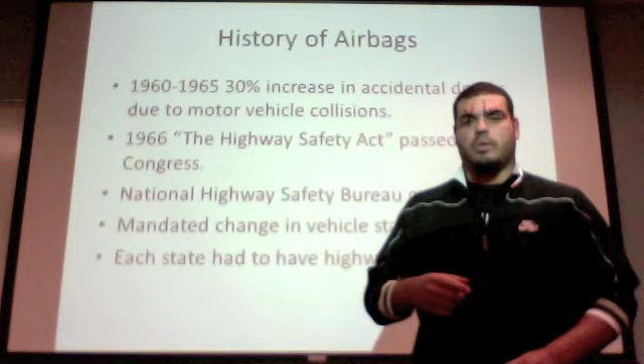We're going to start off with the history with Juan Carlos Herrera. All right. Between 1960 and 1965, there was a 30% increase in accidental deaths due to motor vehicle collisions. In 1966, the Highway Safety Act was passed by Congress, and also the National Highway Safety Bureau was created, which mandated change in vehicle standards, which also made each state have their own highway safety laws.

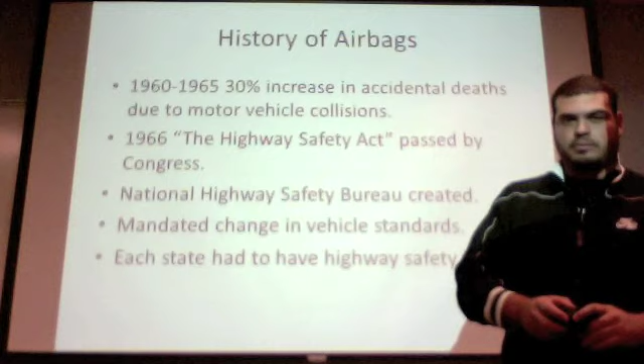All this was needed because as more cars were coming onto the roads, there were going to be more and more accidents. President Lyndon B. Johnson had this quote, "We can no longer tolerate unsafe automobiles." And airbags became mandatory by January 1st, 1973. But these deadlines were pushed back until 1976, and eventually kept on being pushed back because of the safety risks that were continuing to happen with the airbags. But the seed was planted for the need for airbags.

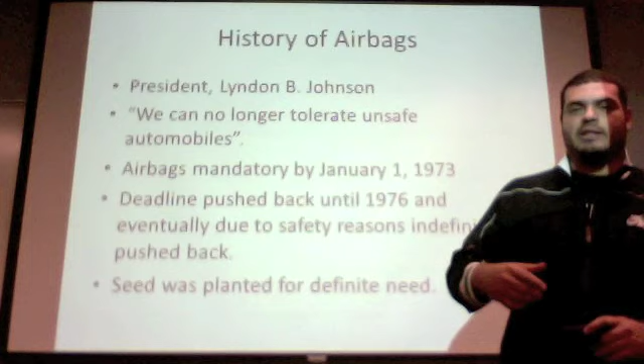And John W. Hetrick was the first person to come up with a patent for the airbag. He was a retired industrial engineer. He came up with the idea, and he called it the safety cushion assembly for automobile vehicles. He was awarded the patent in 1953. This is the patent number, and this is a schematic of the patent that he created.

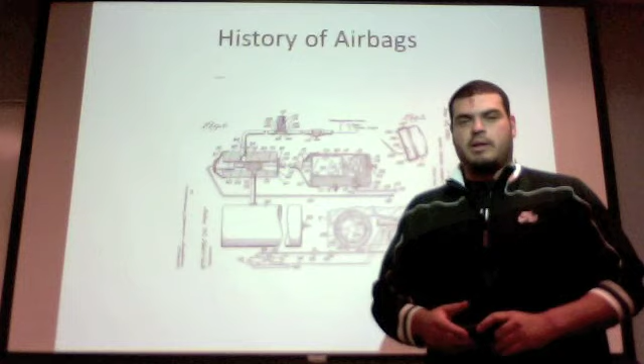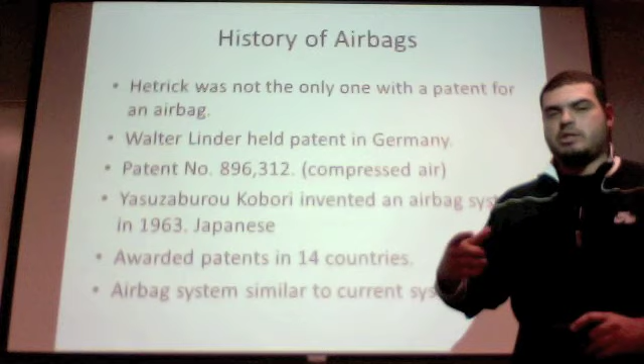He was not the only one to have a patent. Walter Linder also held a patent in Germany. This is the patent number he had, and it used compressed air. Also, we had a Japanese inventor. He also created an airbag system, and it was awarded patents in 14 countries. And this one is the one closest to the models that we're using today.

Allen K. Breed also had a patent for the airbag. He was the first to create an electromechanical automotive airbag system. He was the first to use sensors to detect the collisions in order to deploy the airbag.

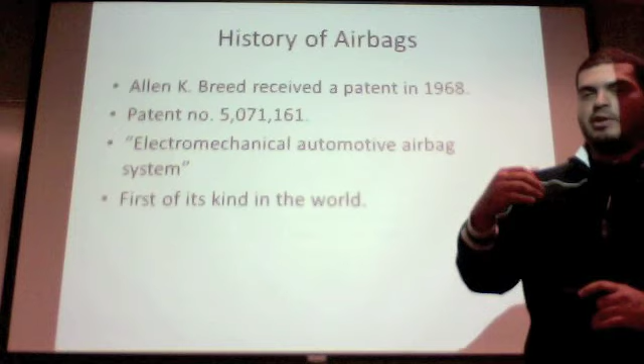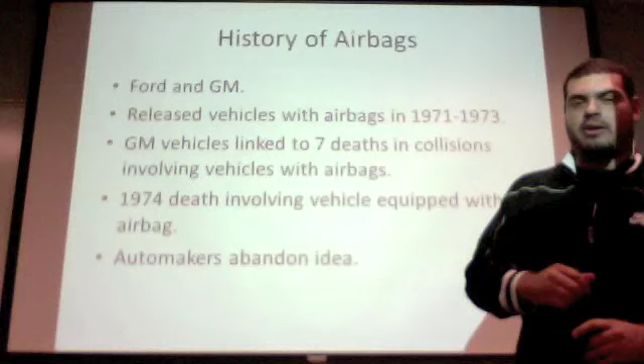Ford and GM were some of the first to go into the airbag business. GM vehicles were linked to 7 deaths in collisions involving vehicles with airbags. And in 1974, there was one direct incident where an airbag was the cause of the death, so a lot of automakers tended to abandon the idea of airbags because of these safety issues.

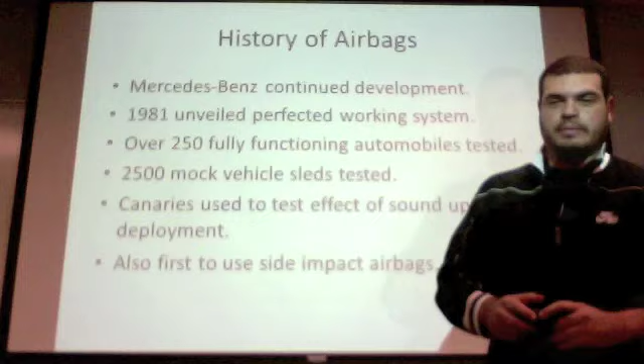Mercedes-Benz, though, continued on the development of their airbag, and in 1981 unveiled a perfected working system. They used over 250 fully functional automobiles and tested them, 2,500 mock sleds that crashed to see how the airbag would work, and they also used canaries to test the sound which would be let off at deployment. They also were the first to have side impact airbags in 1995. Now Chris is going to talk to you guys about current airbag designs.

The current design of airbags can be broken down into 2 parts: the airbag control unit and the inflator unit. The airbag control unit is pretty much the trigger, if you will. It's a microelectromechanical system that monitors a whole bunch of sensors. It also has some sensors built in, accelerometers, gyros, speed sensors, and on top of those, which are included in the module, it also monitors speed sensors, brake sensors, pressure sensors in the doors, all along the vehicle.

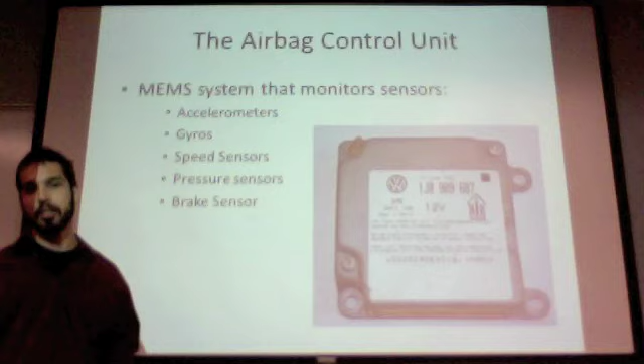It basically takes all the information gathered from these different sensors, and using an algorithm, it determines the angle of impact and the force of impact. It then uses that information to deploy the airbags accordingly. That whole process takes 15 to 30 milliseconds to complete. Once it makes that decision, it sends the signal out to the inflator unit, and on some vehicles that are equipped with slack removal devices for the seatbelts, it does that as well.

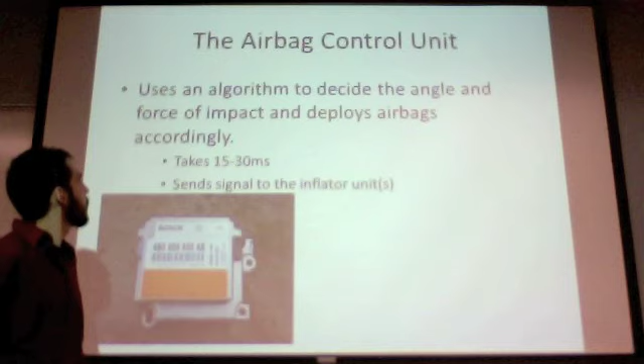The inflator unit contains the propellant, the bag, and the igniter. Once it gets the signal from the airbag control unit, also known as the ACU, the pyrotechnic reaction begins. The initiator, which is basically a conductor wrapped in a combustible material, has electricity pass through it, it gets hot, and the combustible material around it combusts. This ignites the propellant.

Now this causes a chemical reaction which very rapidly produces a gas, mostly nitrogen, and that's what inflates the bag. That whole process of inflation occurs within 15 to 30 milliseconds. All in all, everything happens in about 0.04 seconds.

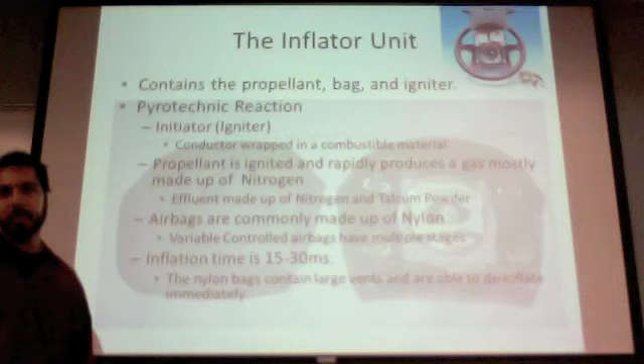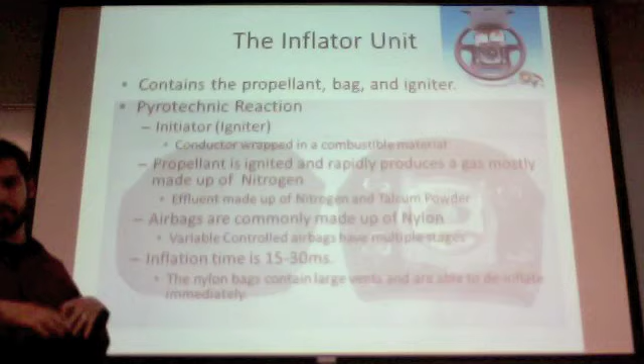Besides the nitrogen, there's also talcum powder in the bag for lubrication, and the bags are commonly made of nylon. They have large vents, so as soon as they inflate, they're able to deflate, and the only thing that comes out is basically the nitrogen and the talcum powder.

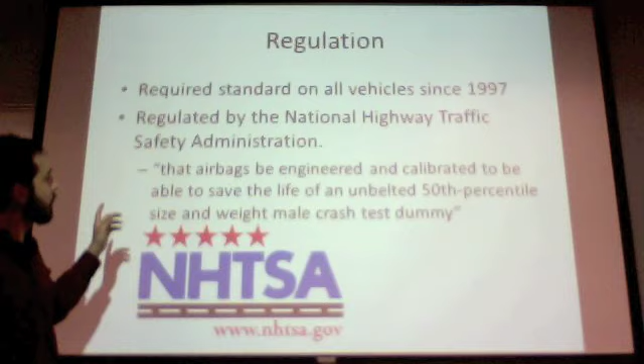As far as regulation, airbags are required standard on all vehicles since 1997, and it's regulated by the National Highway Traffic Safety Administration. Basically, the way that it's written, airbags must be engineered and calibrated to be able to save the life of an unbelted 50th percentile size and weight male crash test dummy. That's the minimum requirement for them to pass.

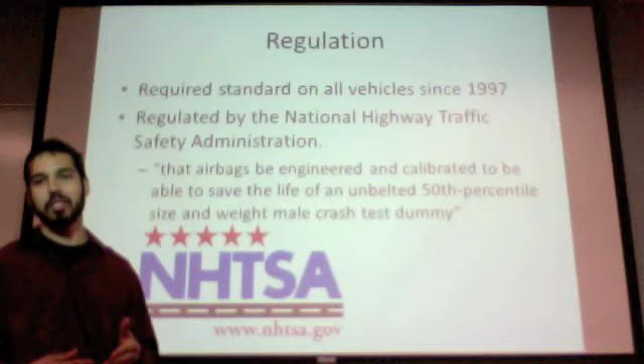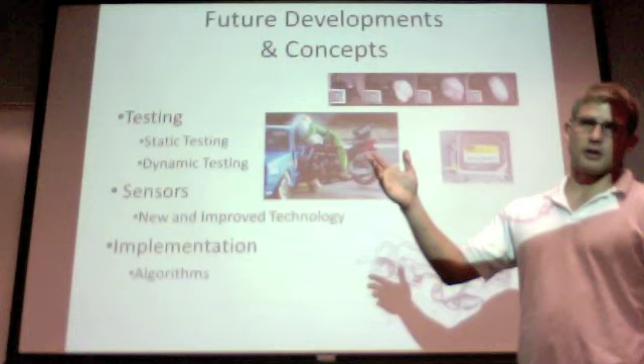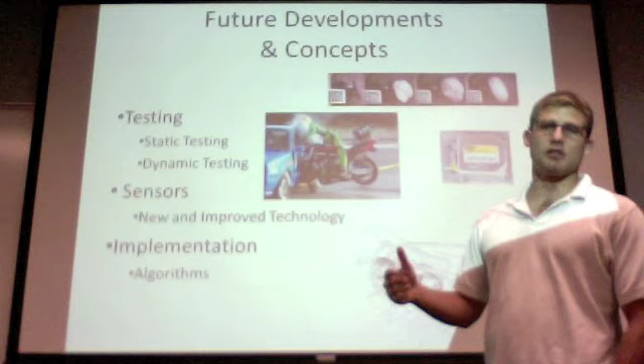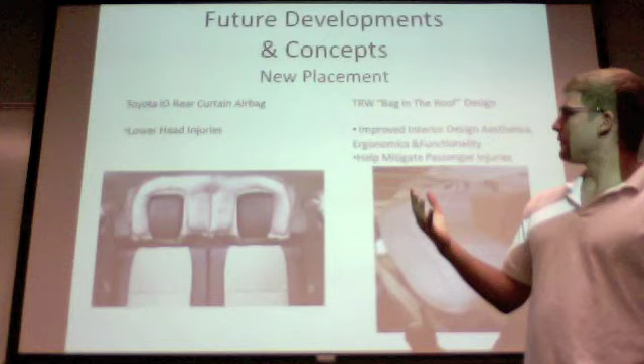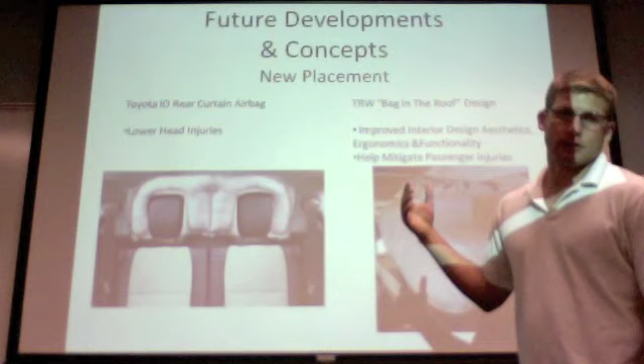The development of airbags is improved through the testing. It's improved by different sensors, new and improved technology. The newer sensors come out, the better it gets. New placement of airbags is also another development of the airbag. For example, Toyota IQ in Japan has rear curtain airbags. Coming out in 2012, Toyota IQ is the first vehicle that has rear curtain airbags. Rear curtain airbags are implemented to lower head injuries. They're actually in the back of the headrest.

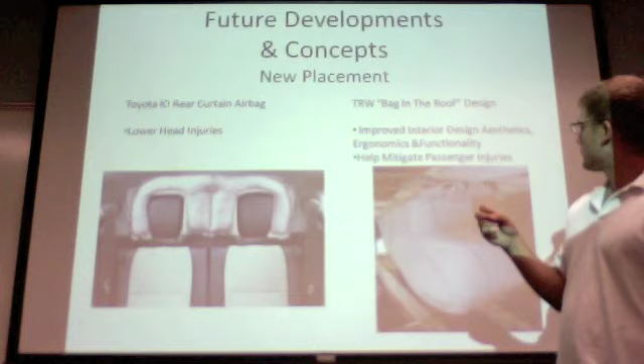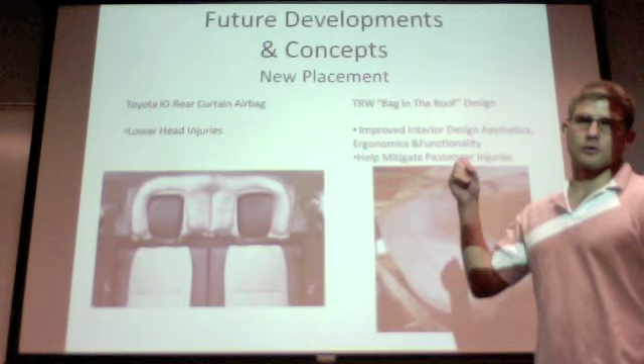For the airbag on the passenger side, there is a design created by TRW called Bag in the Roof. This improves the injury rate because in previous designs it came out of the dashboard, and on the dashboard it would have a long area to come out and help the passenger in a crash. This one comes out of the roof. It's easier to put on the car. Multiple cars can have the same design, so it is also cheaper.

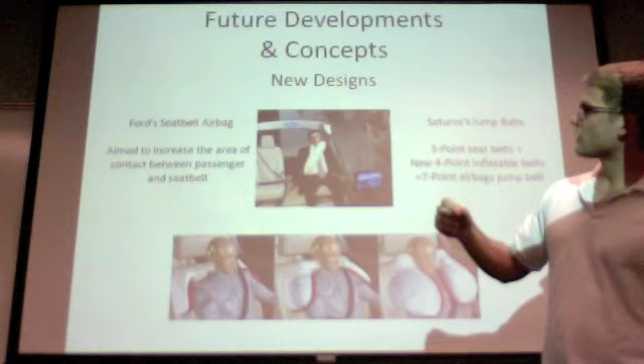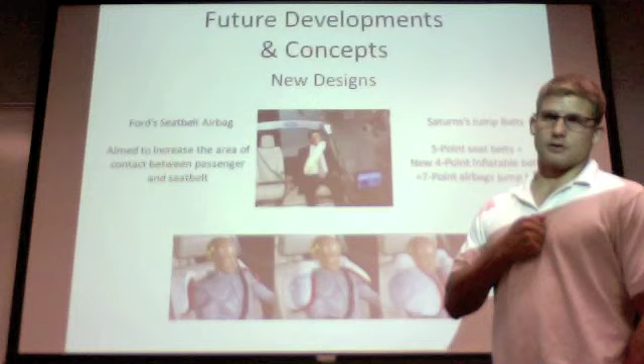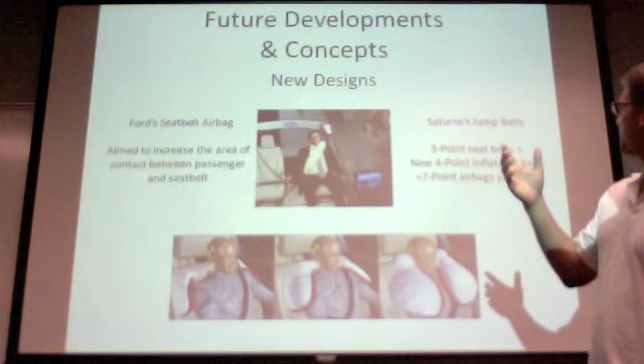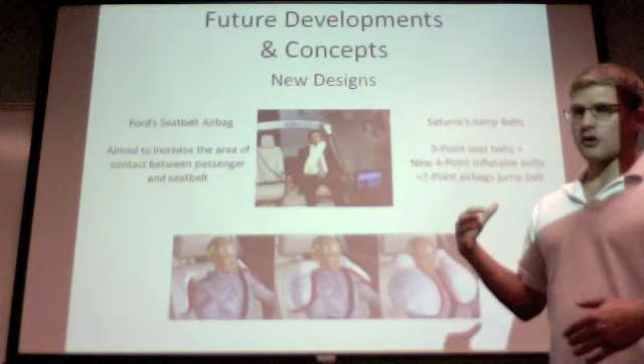Other completely new designs for airbags can be created. For example, Ford's seatbelt airbag is aimed to increase the area of contact between the passenger and the seatbelt. What it does is all the stress, the force from the airbag on impact, would not hurt the passenger. Also, Saturn's new design called the jump belt, which is shown on the bottom. It is an airbag that is released off the shoulder of each passenger, and it would act as a harness. So imagine being on a roller coaster, and it'll hold you back from being projected forward.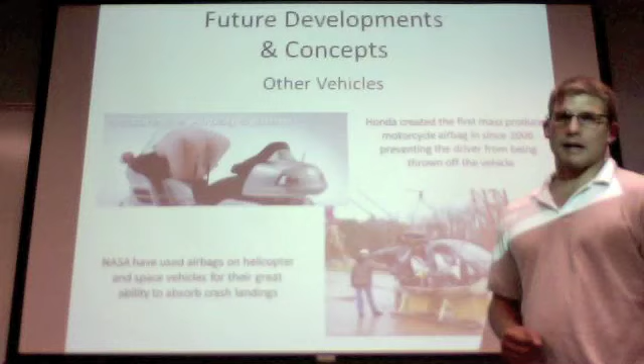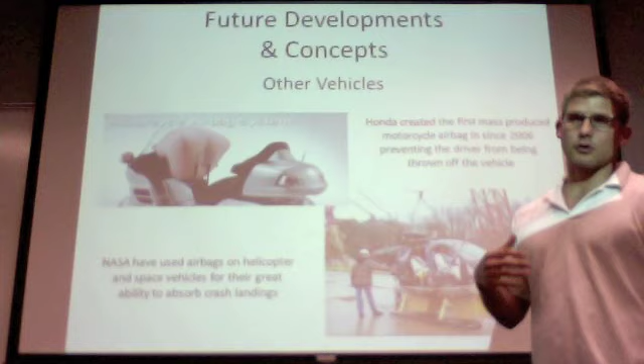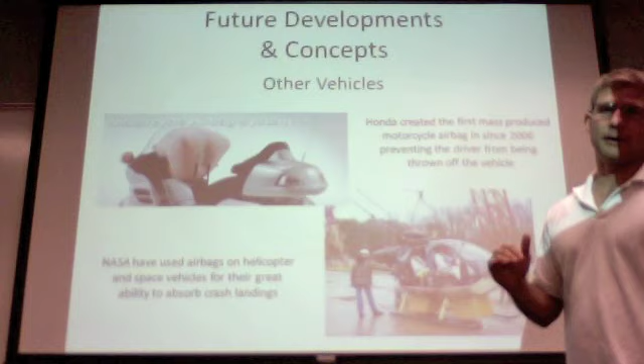Other vehicles that use airbags are vehicles such as motorcycles. Another design is what NASA created over here, which used airbags on helicopters and space vehicles because of their great ability to absorb shock. This test specifically was a helicopter dropped from 45 feet, and they studied the impact of a 45 foot drop to the ground.

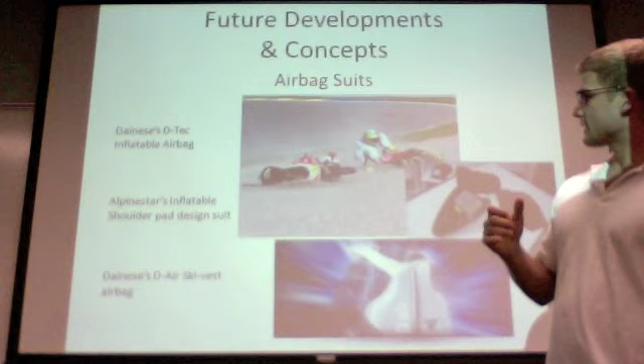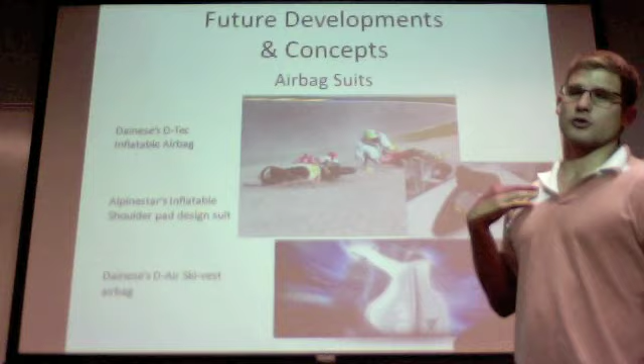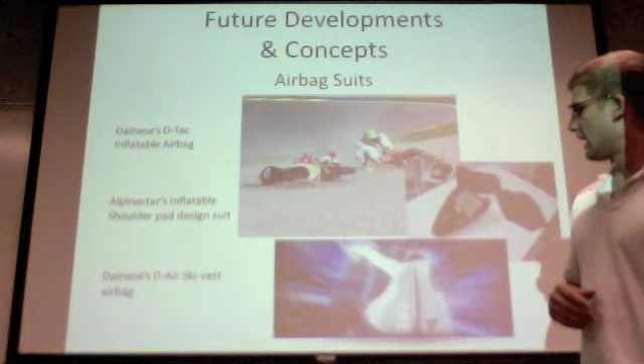Airbags are also used for suit designs. Recently, the company Dainese made 2 suits, one on the top here and one on the bottom. The top one is called a D-Tec inflatable airbag, which acts as shoulder pads once the motorist is launched from his motorcycle. It deploys and protects against the most common injury of collarbone fracture. Another design is the bottom one, which they call the D-Air ski vest, which is used by Canadian and U.S. ski teams currently, and it helps them avoid injury.

And in conclusion, we're going to have Dennis wrap it up. The airbag design has been under development for over 35 years, and since its introduction to the automotive world in 1971 with Ford and GM, it was only in 1997 that it actually became mandatory for all cars to be sold with the airbag system. And even though there are still improvements to be made, airbags have gone through a long road and many iterations before they got to the system that we know today. A key part to safety and the well-being of passengers in the vehicle.

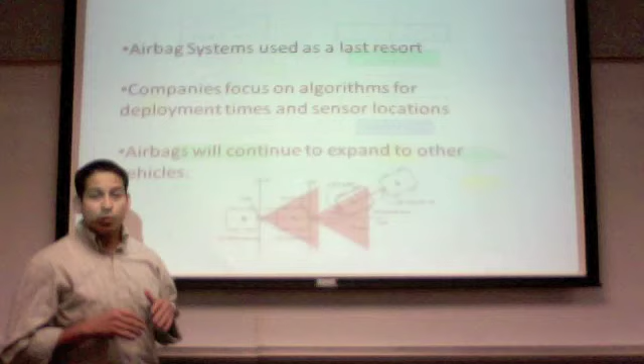And as important as they are, they're only the secondary system to the whole safety system of the car. And so it directly links them to the lives of the passengers. For that reason, it's imperative that the airbag system is a robust system. And companies focus a lot on the algorithms. Those are proprietary to their airbag systems, and basically the algorithms are for matching the deployment times in conjunction with the airbag sensor placement and everything like that. So that is the most sophisticated part of the whole airbag system.

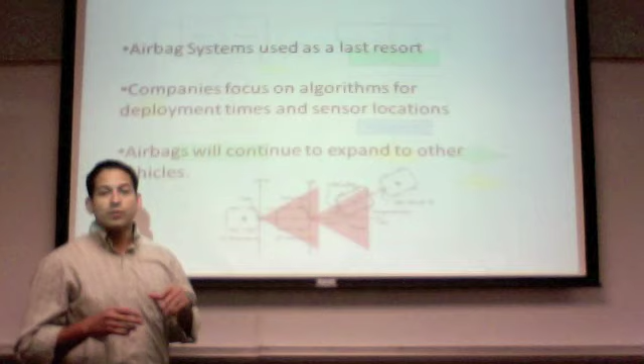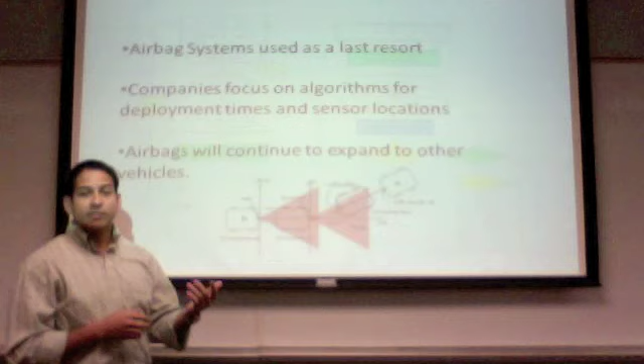And as airbags continue to grow and develop and become more sophisticated, we can continue to see them expand into other realms of vehicles, such as we saw with bicycles and motorcycles, possibly watercraft, and maybe even sometime in the near future airliners. So, as we know, airbags are going to be around for quite some time.